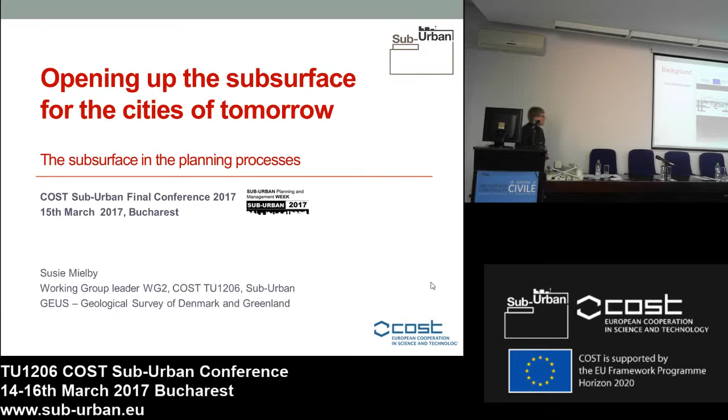The background of this presentation is the summary report that we have done. I don't know whether you have seen it, but there were examples of it outside, though they disappeared. As you can see, I'm not the only author—there are several other authors to this report.

Work Group 2 receives information from Work Group 1 and delivers to Work Group 3 and 4. Work Group 1, as David said yesterday, made some observations that we could work with, and we deliver some results to Work Group 3, which covers tools and dissemination.

What I've taken from those observations today is some of the things I think are important to tell you, though there's more in the report. One key point is that the open subsurface is important for urban development, but it's only considered when absolutely needed—we've heard that before.

Another point is that the subsurface and climatic conditions in cities vary, which means we can't use the same model and the same strategy for modeling and using the subsurface. We need to adapt to specific and local conditions.

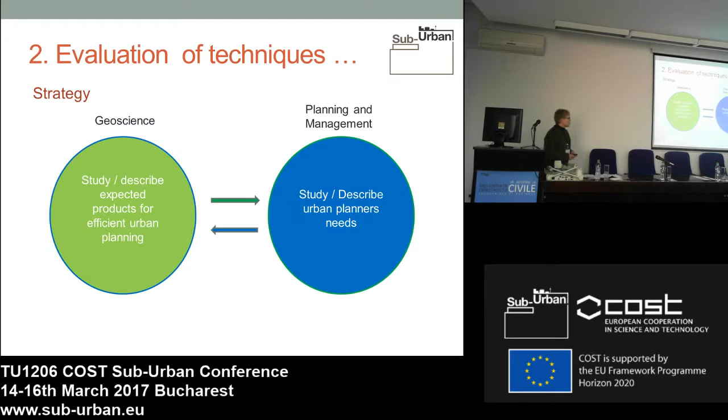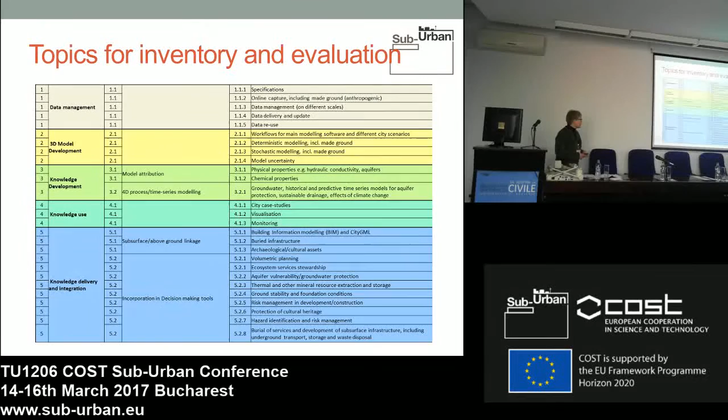Work Group 2 is organized into 9 subgroups. I think about 60 persons have been involved in this work, plus many more people, but 60 is the right figure for those directly involved in the subgroups.

The first subgroup was subsurface information and planning, which was the planners' side of it. Then we have all the technical groups: data acquisition and management, 3D modeling, visualization, groundwater, geothermal modeling and monitoring, geotechnical modeling and hazards, geochemistry, cultural heritage, economy, and integrated modeling. These groups worked on evaluating needed techniques.

Today we'll hear about integrated modeling, which is part of both Work Group 3 and Work Group 2, since Carl and Jerome will present something after this. Ingela will talk about subsurface information and planning, and Hans de Beer will discuss his experiences with cultural heritage. Tomorrow we'll have two presentations on geotechnical modeling and geochemistry relating to this Work Group 2 work.

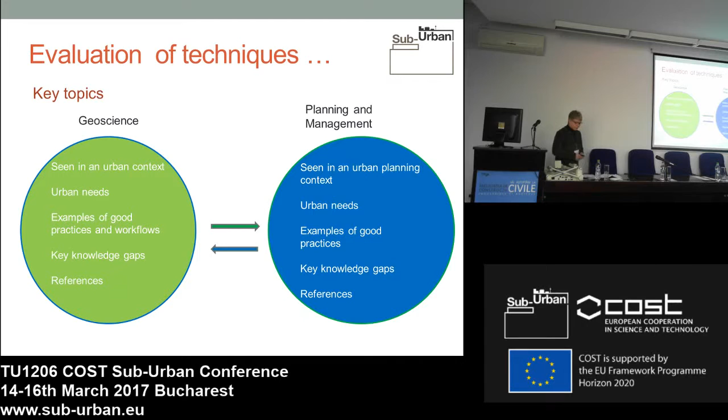What we have observed and seen, I hadn't made all these squares, but the main results dealing with deviations from normal hydrogeological mapping is that man-made activity and deposits make urban areas special.

We have to bear that in mind. That means the man-made activity over time, deposits, the infrastructural data, and the connection to the geology also need to be considered. And of course, we have all the scale differences.

But I guess that Joan and Carl will talk a bit more about that later today.

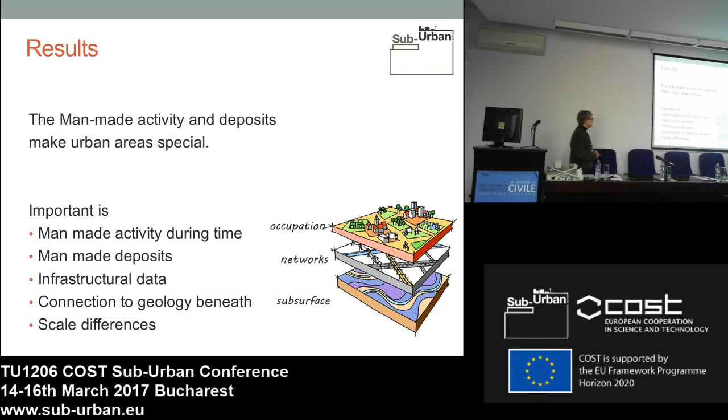The results seen from the planning side are that strategic planning content, organization, legislation, decision making, and scale are important.

It's also important how the underground is used at the moment, and what is of interest for improvement in the future. And then they want access to the right specific data and information.

And not too many data, I guess. And then of course collaboration and communication. Ingela will tell more about this later on today.

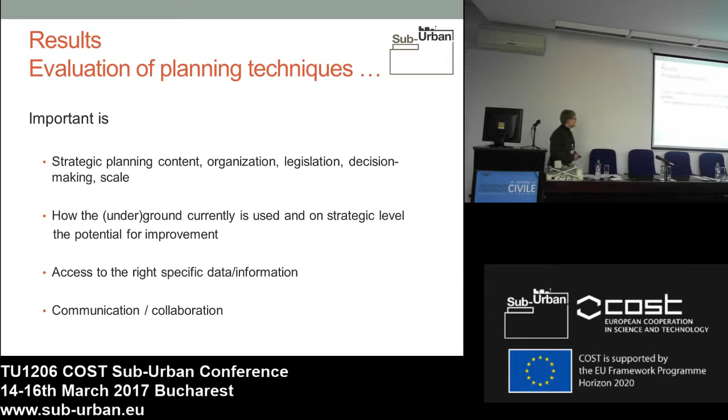The available techniques - we will see that there are many different solutions and no size fits all, as mentioned also by David yesterday.

You'll see that there are many good examples showing important topics, and there are many workflows elaborated in cases where they would be useful.

And there's a key knowledge gap collection also, which is also important, and we also try to gather it.

And some of the work groups have delivered a report for the topic, and I think some of them are quite comprehensive, up to 100 pages. So it's not a small work.

It's actually, considering that this is all non-paid work, a very good deal that COST did here, because they've really got a lot of information gathered by the groups that worked with it.

There's a report for data acquisition and management. There's one for 3D urban subsurface modeling, geothermal modeling and monitoring, and groundwater.

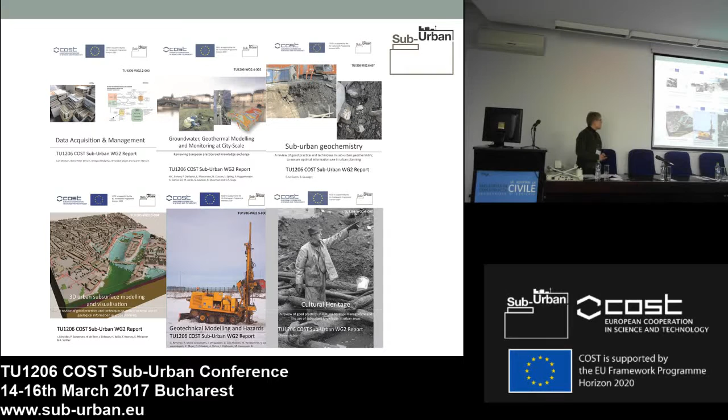Then I'll move to analysis and discussions, and I'll mention two things: the data communities of practices, and then what the right kind of information is.

We have 4 data communities of practice that haven't been working very well together, but they are integrated in urban areas. We have the urban planning and management, as mentioned before, but we also have the building and construction system, BIM.

And on top of that, or on the bottom of that, we have the environmental systems that are used, for instance, connected to the water framework directive.

So far, the planning and management has been very focused on a specific area and the existing and planned land use and service. And this is very much into GIS.

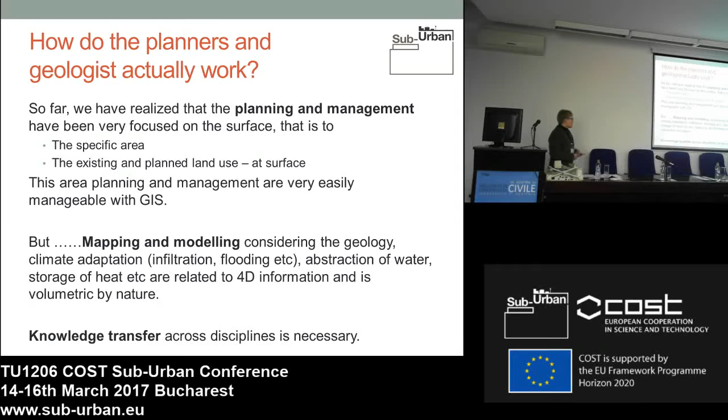If we deal with the area-to-environment transition, the European Environmental Agency has worked on some systems dealing with indicators.

The MDIAK reporting chain, which means monitoring, data, indicators, assessment, and knowledge chain.

They have defined that, and they have also defined the DPSIR framework, which links drivers, pressure, state, impact, and responses, which should be a simple political way of understanding the system.

But it gives an opportunity to, in a simple way, monitor progress and impacts.

Very shortly about integrated modeling - there's no example. We were asked to do an example showing a fully integrated model, but it showed up that there was no full example of a fully integrated model that we could use.

So we have worked a bit on how we can connect the BIM and the CIM and the subsurface, and that's also what Ron and Carl will tell about.

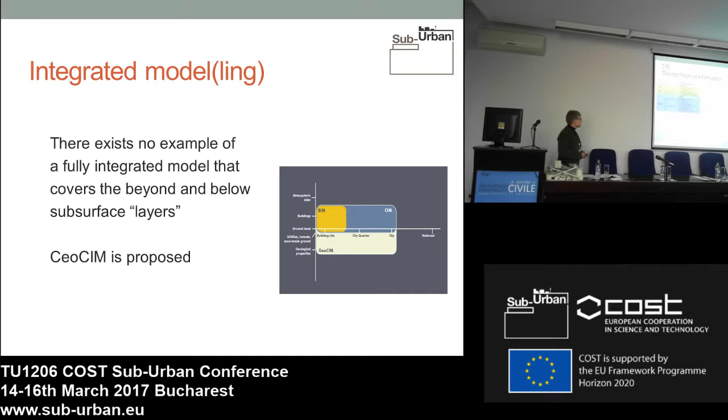Then we'll talk about the right type of information, and I've shown you this diagram before, and if we zoom in, we'll see all the planning items.

All the possible planning items that we could deal with when integrating planning and subsurface.

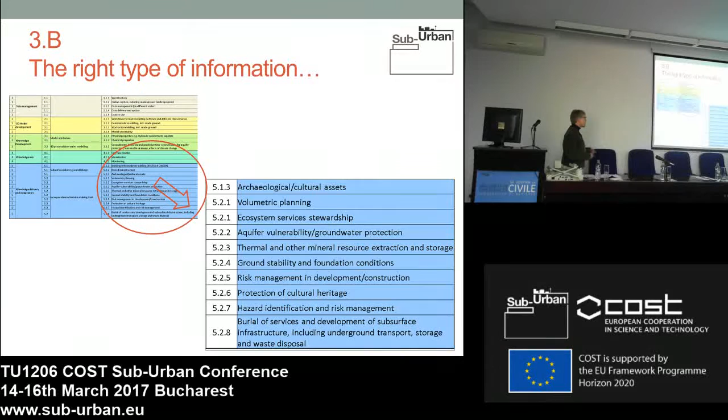We are also seeing this decision making stair, and I think we can agree that decision making is highly dependent on the collation, integration, and aggregation of the subsurface model.

What is important is the time here, because you don't do it in one hour, and in some cases...

Point out that with existing maps, okay, you can make decisions, but maybe it's not enough. You need to have more data before you can make your decisions.

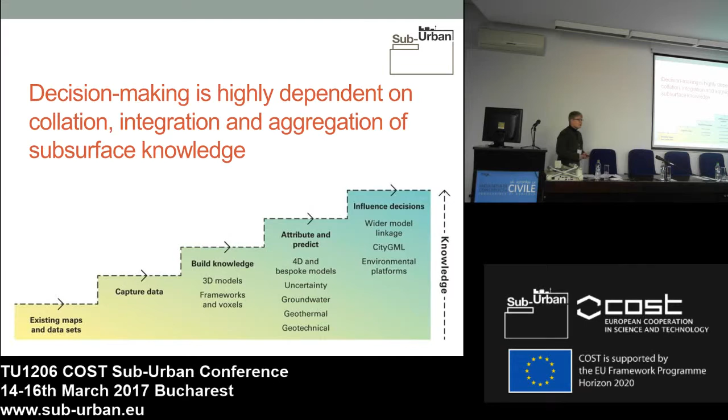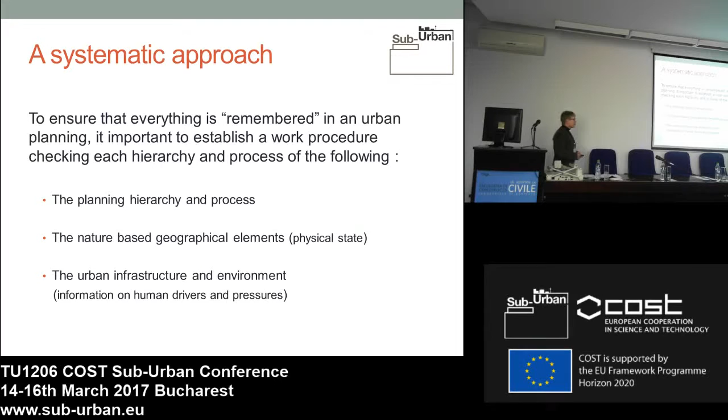And the systematic approach, we have to ensure in a complex picture that everything is remembered. So we need to have a process that ensures remembering the things for the planning here, the process for the nature-based geographical elements, and the urban infrastructure and environment, the pressure and the drivers.

For the planning process, we have the planning stage, working scale, time frame, societal themes and economy, and I think you'll come more into that.

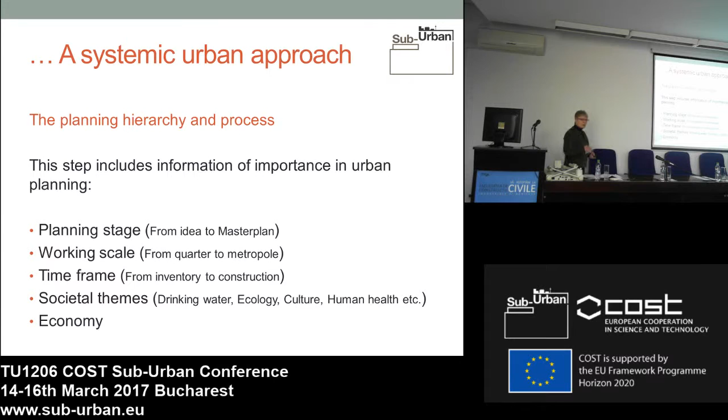Nature-based geographical elements that we have to take into account: geology, of course, sedimentary, hard rock, its ongoing expectation of the geological processes, hazards, and such things.

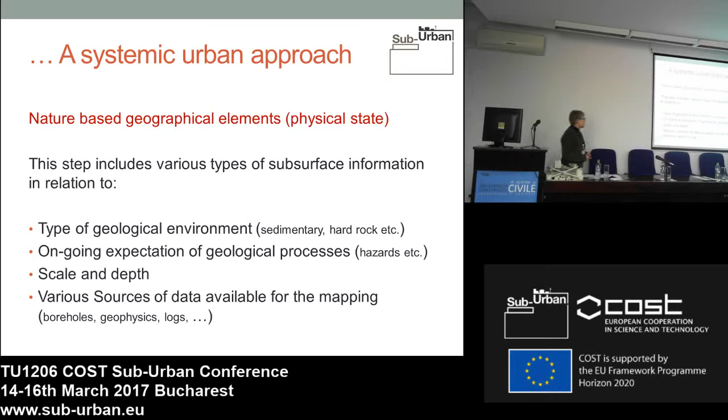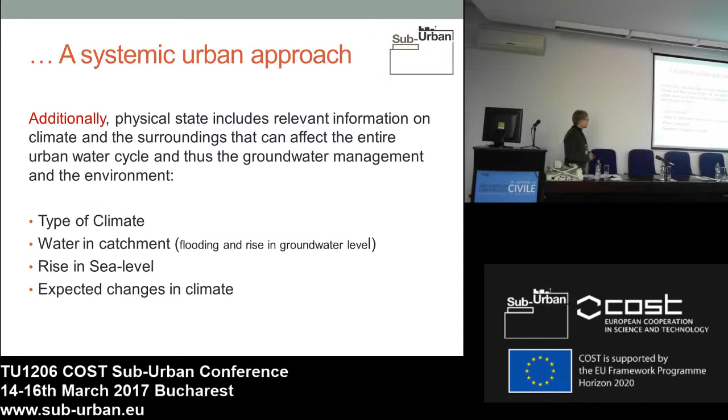Scale and depth, various sources of data available for mapping is also an issue that we have to deal with every time. And additionally, if we talk about the water cycle, we also have to remember type of climate, water catchments, rise in sea level, expected changes in climate.

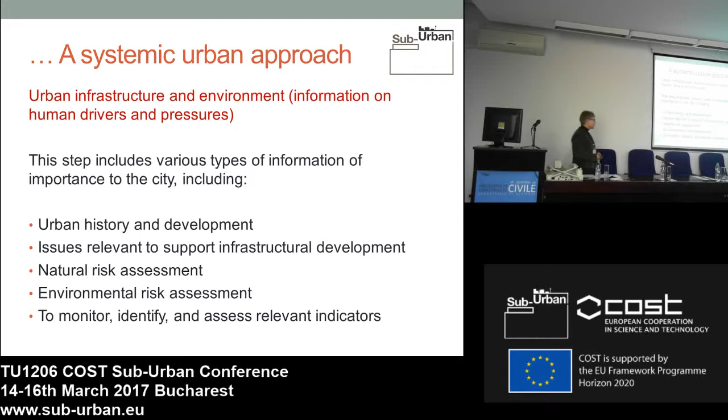And then, of course, urban infrastructure and environment, history of the city, issues relevant for infrastructural development, natural risk, environmental risk, and of course also to monitor, identify, and assess relevant indicators.

A systematic work also includes integration of management structure products, decision on indicators to be monitored and followed, decision on conceptual models, maintenance of data used and models used, screening procedures for sufficient data and decision foundation, and considerations about replicable handling as well.

Because it would be nice if we make two investigations and get the same result.

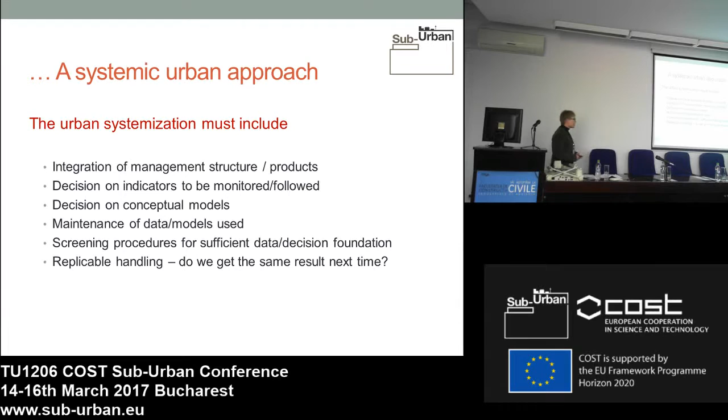I have to be fast now, I can see.

We also have to consider the urban data cycle for planning, with sufficient data to update the database and create and update the model. Next time we will have the application and maybe the construction, and we have to do this cycle every time to improve what we work with.

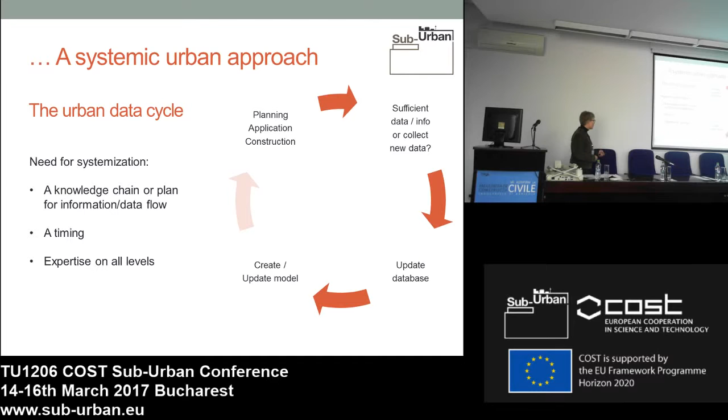And now my conclusion: we have made a summary report and 6 detailed subgroup reports. We have proposed various steps towards improved provision and uptake of requisite subsurface knowledge, and ensuring its accuracy and appropriateness.

This includes a systematic approach that is based on the crafts and tradition that planners and geoscientists have developed over time. And this also includes that we need access to relevant data, the faster the better, and a closer collaboration between planners and geoscientists.

This is what I could manage to explain to you within 20 minutes. Thank you.

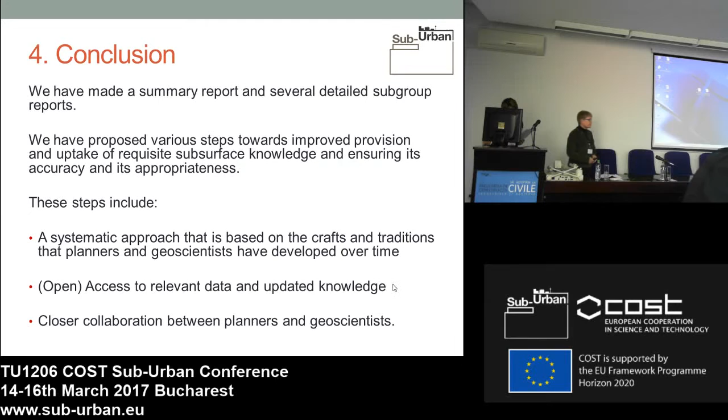Well, I really like the presentation and the entire scheme you gave. In whose hands does this kind of knowledge and instruments have to be given? Who is the institution or group of people that have to manage this entire set of information? Now I'm only talking for myself.

I think, in some way, some of the responsibility is a governmental responsibility, if we want somebody to follow up and do decision making. So in the final end it's the state of the country.

But if we go to the cities and talk about planning, then we have the people who say this is sufficient background to make decisions on. They have a responsibility, in my point of view.

But I don't think that people employed in the urban city, it's only the biggest cities that will have enough resources to do this job, because if you go down to the smaller cities, you have 2 or 3 persons doing everything, and it's too complicated a task.